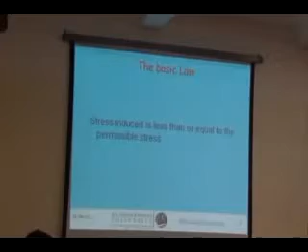Whenever you talk about design for strength, the basic law is the stress induced is less than or equal to the permissible stress. The basic law which we should worry about in design for strength is the stress induced is less than or equal to the permissible stress. Let me explain what this means.

Every material, basically, materials are classified into 2 categories. Yes, can somebody say? Materials are categorized into 2 categories. One is brittle materials, the other category is ductile materials. Brittle, ductile. Can you give an example of a brittle material? Glass is a brittle material. Any other example of a brittle material? What?

Ceramics. Okay, ceramics are brittle materials. Any other material which is brittle? Any other material which you can see around which is brittle? Yes, somebody said that? Brick is a brittle material. Concrete is a brittle material. Rock is a brittle material.

Can you give me good examples of ductile material? Steel, copper, gold. Gold is an excellent ductile material. Aluminium is a ductile material. Good. Okay, now let us go back to what is the difference between a brittle material and a ductile material.

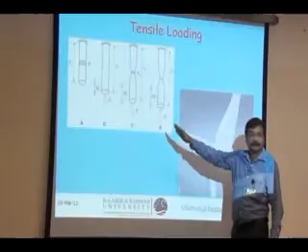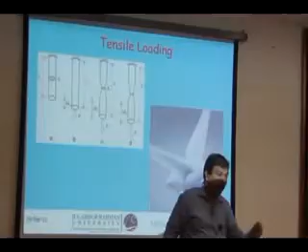Now let me go to the next slide. Let's see what happens typically. This is a slide I intend to use later, but I want to use it for some other purpose. Here is a material, a rod. The rod is fixed at one end. It is pulled at the other. Okay. Now the loading continues even beyond the elastic limit. You can see some plastic deformation taking place, some permanent deformations taking place.

This is a typical example of how a low carbon steel rod will fail when you load it like this. You will be doing these experiments, all of you. A typical low carbon steel fixed at one end, pulled at the other, will first plastically deform and then finally it will break.

So prior to failure, there is some plastic deformation. Such failures are called ductile failures. These ductile failures are relatively better for us because they give you a warning. They give you a chance to know something is going wrong, it is going to fail.

On the other hand, brittle materials don't undergo any plastic deformation prior to failure. All of a sudden, without any warning, without plastic deformation, brittle materials fail. So, if you are using a brittle material, you have to be doubly careful.

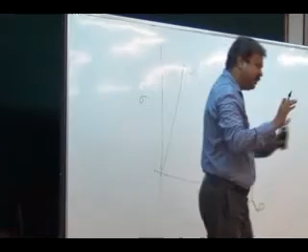So as the stress is increased, the strain also increases. So at this point, you see something funny happening there. If the stress increases and the strain also increases, you don't have any objection. That is a very normal behavior. The load is increased. What is stress? The load per unit area. Strain is increase in length per original length. So stress increases, strain also increases, there is nothing to worry about.

But on the other hand, at this point, the stress doesn't increase. You see the y-axis doesn't increase. In fact, it slightly comes down. But what happens to strain? That is a very dangerous phenomenon, is it not? I am not increasing the stress, but still the strain is increasing. It keeps on deforming.

So this particular point is called the yield point. It is a very poetic word; it is as if the material resisted up to a certain point and then it started yielding. In English you say, don't yield to his pressure. What is that? Don't give way. Don't let him pressurize you, but still you resist. This point is referred to as the yield point. I elaborate on this because this you must remember always.

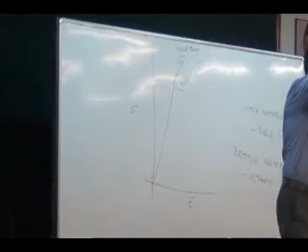Okay. Yes. So this graph is for a ductile material. The example is low carbon steel. Have I made a mistake? This graph is for a ductile material; an example is low carbon steel.

The graph I have drawn is specifically for a low carbon steel. For aluminium it will be slightly different. For copper it will be a little more different. But essentially it is for low carbon steel. Is it okay? Any doubts? Now, I will go to a brittle material.

See, one of the examples of brittle material is cast iron. Grey cast iron is a brittle material. Let me not say generally cast iron. I am very specific. There is a particular category of cast iron called grey cast iron. You would have seen grey cast iron in all the machine tools. Lathe bed is made up of grey cast iron. Most of the casings are made up of grey cast iron.

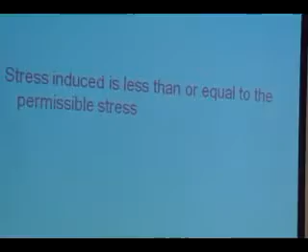Now, this is where the basic law of design for strength comes, which says very clearly the stress induced is less than or equal to the permissible stress. This is what the permissible stress is. So what is the basic rule governing the design for strength? The stress induced in the member must be less than or equal to the permissible stress. Shall I proceed further? Next slide.

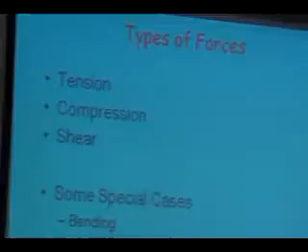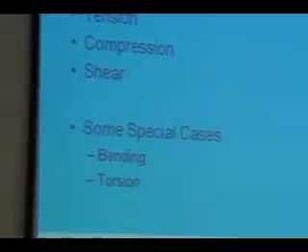Now, what are the various types of stresses that I can anticipate? There are basically three types of stresses. One is a tensile stress, the other one is a compressive stress, the third one is a shear stress. My objective today is to make clear what these three stresses mean. Some special cases we will discuss later.

Now there are many situations in which you subject materials to a tensile load. Now I have a bag. Imagine this to be a load. What is, by the way, the load-bearing material in the human body? Load-bearing elements. Bones. The structural member of the human body is the bone. Now I am carrying this bag. What is it doing to my elbow bone? Is it subjected to tension? Is it subjected to compression? My elbow bone is stretched. Are you able to visualize it?

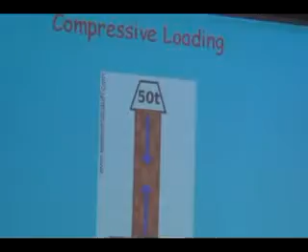Now, next. So this is an example of a compressive load. You have a typical column in which the column is subjected to a compressive load. When I stand, my leg bones are subjected to compressive load. As you sit on the chair, the legs of the chair are subjected to a compressive load. Is it okay?

Now, next slide. What is most interesting and difficult to comprehend is a shear load. As mechanical engineers and aeronautical engineers, you should have a very clear idea of what a tensile load is, what a compressive load is, what a shear load is. And when I give some instances, you should be able to tell whether it is tension or compression or shear. Suppose let me take two plates which are joined together by means of a bolt.

You have two plates. I drill a hole. It is easy now. I drill a hole. I put a bolt. And then I join these two plates together. Now the two plates are pulled apart like this. Now I am not imagining situations.

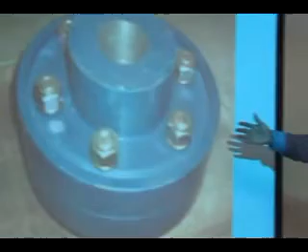You have a coupling. All of you might have seen different couplings. This is one flange, this is another flange. They are joined together by means of bolts. One flange is connected to the motor and the other flange is connected to the pump. When it tries to rotate, what happens? One flange tries to rotate in one particular direction, the other flange is connected to a load, so it is not rotating so easily. What happens to the bolt? Again, it is subjected to shear.

So when on the turbine side it is trying to rotate it, on the generator side there is some resistance to this rotation. What happens to the shaft? It is subjected to torsion. It is subjected to shear.

So the third type of load that I want all of you to appreciate is the shear loading. So you know about tension, you know about compression, you know about shear. In fact, tension and compression are not two different things. There is a common terminology for that, called axial loading. Along the axis: if this is the rod, if I pull it, it is tension. If I push it, it is compression. So both the loads act along the axis.

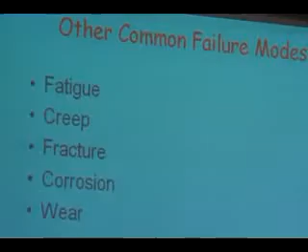There are a few other common failure modes. I will just mention these things. There is something called fatigue, there is something called creep, there is fracture, corrosion, wear. You should know about all these things.

Suppose I give you a small piece of wire and ask you to break it into two. I am not giving you any tools. How will you do it? Pull it? It is a steel wire. Twisting, good thinking. How will you bend? No, I want this answer because it is convenient to me. Rubbing on the ground, scratching the point at which you want to break, these are all possible. But this answer appeals to me.

He says, if this is the piece of wire, he will bend it repeatedly like this. That sounds to me to be the easiest way to break a steel wire. We can do many other things, you can scratch it on the ground. But to me, without any tools, the most intelligent way to break a wire into two is bending the wire repeatedly. Very thin? I don't know. But wire can be bent like this. Like a thread. But my point is to break it.

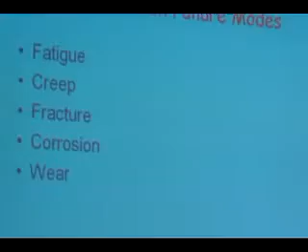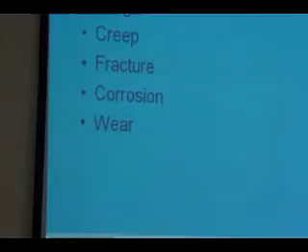Now, in another 5 minutes, I will give you a small introduction about the assignment that we are going to do. Can you please distribute it? Quickly go and distribute it. This is the third assignment. This assignment, for a difference, you will be working in groups of 4. And please believe me, you don't have a choice to form the group. I have already formed the groups. It is listed there. Number 1 to 4 will be one group, 5 to 8 another group, 9 to 12 another group, 13 to, it goes on like that.

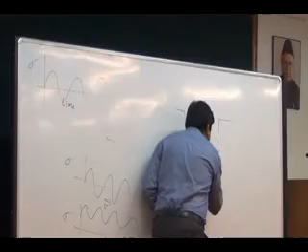Now what you have to do is, you have a river. The width of the river is 600 mm. Is there any mistake there? No. The width of the river is 600 mm. What you have to do is, you have to design a bridge to cross this river.

The width of the bridge is suggested it can be 1 pop stick length. It can be bigger, but there is a constraint. The weight of the bridge should not exceed 400 grams. And please note, you will be evaluated based on the maximum weight that bridge can carry divided by the weight of the bridge. So you have an incentive to minimize the weight of the bridge. There is no point in making use of all 400 grams in making the bridge.

At the end of the day, all the bridges will be broken. We will apply load and then we will break the bridges. The breaking load divided by the weight of the bridge, that will be the evaluation criteria. The best 3 bridges will get some certificates and awards also. Again, the emphasis is to design and fabricate. Please don't reduce it to a school exercise wherein you do some funny project to stick something together. There must be some clear, rational, scientific explanation for the shape you choose. Is it okay?

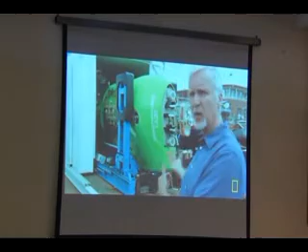36,000 feet below the surface, and we're going to take a couple of them for a ride so that they can experience what Cameron is seeing and experiencing as it descends to this alien world.

Please believe me, it is roughly about 11 kilometers. The pressure of the water itself is 100 megapascals. The mild steel I told you, low carbon steel, it will get crushed at 300 megapascals. In whatever shape it is, it will get crushed at 300 megapascals. And the water pressure itself is about 100 megapascals. It is a very difficult issue.

Okay, they have created a spherical structure. Of course, he has another video which talks about it. A spherical structure. The wall of the structure itself is about 62.5 mm thick steel. It is a special steel, not low carbon steel. And if something happens, if the structure collapses, the human being will get crushed like a mosquito under the water pressure itself. So it is a heavy risk. The design of the Deepsea Challenger is worth looking into.

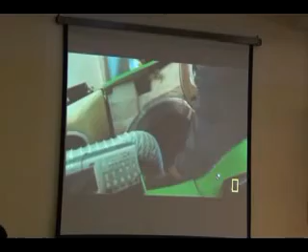Now, I strongly advise you go through the information on this. There are many engineering problems associated with it. I'll just say one and then leave it. One of the big problems was you reach 10 kilometers down. To come up, what you have to do is you have to shed some weight. So there were steel plates attached to the Deepsea Challenger. These steel plates have to be released. Then your weight gets reduced. Because of buoyancy, you will slowly come up.